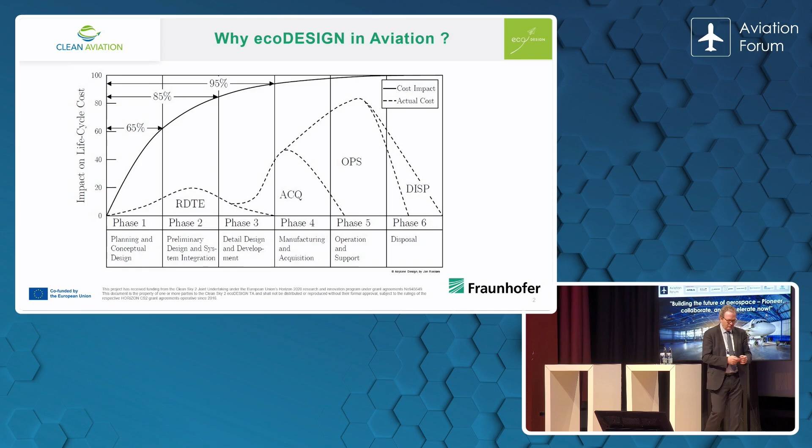That's what matters and distinguishes ecoDESIGN technologically. There are a lot of very simple principles in the ecoDESIGN phase for an engineer. For example, the aviation industry takes a clear vision toward modernization-oriented and repair-friendly product design, as well as substitution of hazardous chemicals regarding REACH compliance.

And of course, standardization of components, a suitable design for sorting and testing, as well as wear steering on selected parts where corrosion or other issues could take place.

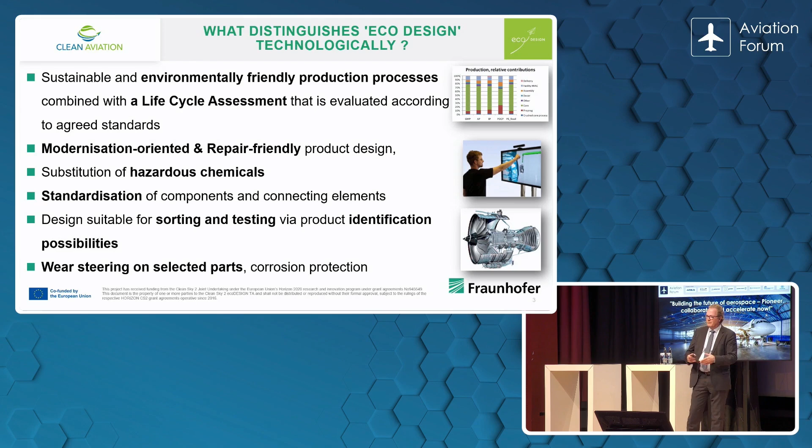But one of the most important tools for the final improvement and proof of sustainability is the life cycle assessment method. It's not rocket science, it's just a tool already developed, and you can easily compare results from different technologies in relation to their final impact on the environment.

Sustainable aviation is not only reduced to carbon dioxide emissions, NOx, or noise emissions - no, it's really more than that. It also means taking responsibility for hazardous materials as well as socioeconomic aspects - what will the working place of the future factory look like?

That is already combined in the so-called life cycle analysis, combined with the design for environment, called the 2020 plus guideline. And I will show you some principles.

I'm sorry for the bad quality, but if you're talking about life cycle assessment, that means you have to collect a lot of detailed data on the certain processes, starting from the raw material, producing all these metals, polymers, and chemicals for production, as well as during the production phase process in the factory.

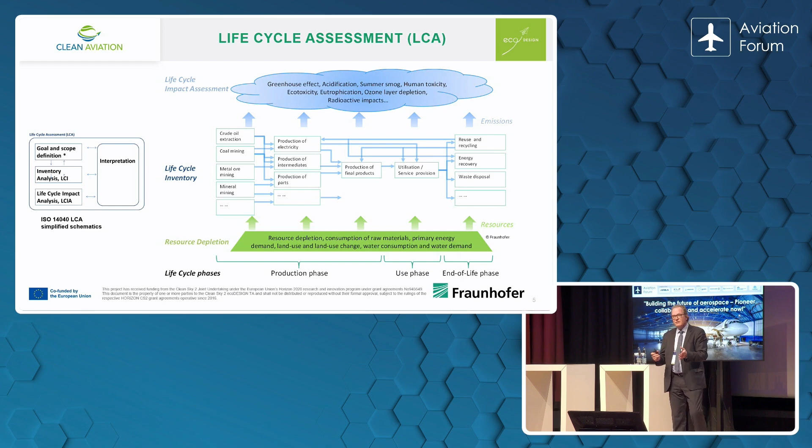And you also have to take care, after lifetime, about recyclability of these materials. That is of course a real challenge, because in some cases the targets are counter-current - you would like to have a really stable material during its lifetime, but you also want recyclability at the end. That is really a challenge for future material developments.

Just have a look, for example, at the actual status in the so-called Clean Sky joint undertaking, the biggest European activity with all the aviation producers in Europe.

At the moment we have around 200 technology pathways already in our database, with around 550 processes. And it's not just collecting data - there's a lot of algorithms behind it to reduce and compare these different processes, always reduced to 1 kilogram of product or 1 square meter of a product.

That means you see here one example - it's really a comprehensive study and also laboratory work, talking with the engineer to get the full status.

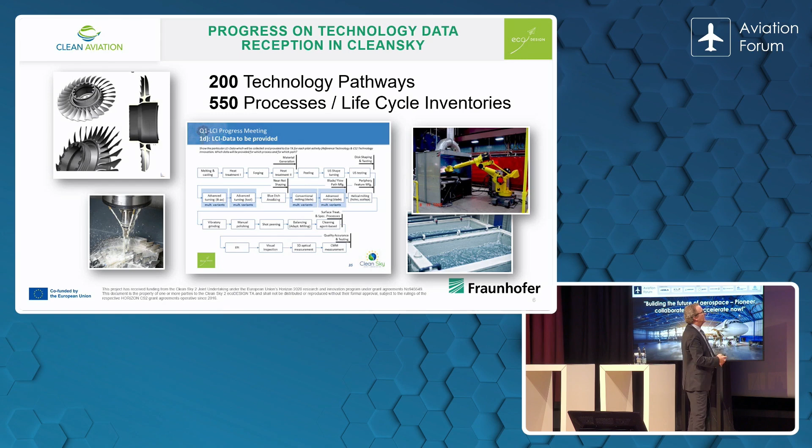Here you see what efforts are made in the running Clean Sky activities, where all 6 platforms - these typical modules of an airplane - have realized their certain flagship demonstrator as a representative of the most sustainable technology at the moment and for the future airplane. For example, large passenger aircraft with a multifunctional fuselage and advanced rear ends.

All these components were collected, the data, then recalculated to bring it on the same comparability. Then you come to a life cycle inventory where all the data are comparable. And then you will come finally, of course, to the eco statement.

And meanwhile, at the moment, we have more than 30 indicators which were calculated automatically if all the data are inside.

And then it's not the duty of Fraunhofer to decide, okay, you have a part where wonderful small energy consumption has a problem probably with more cancerogenity of this part. No, we just calculate all this data and give them to the data owner of these flagship demonstrators.

And that is, of course, then the turn back to discussions with the companies to say, okay, these data we have to discuss about. What are the main advantages and main disadvantages?

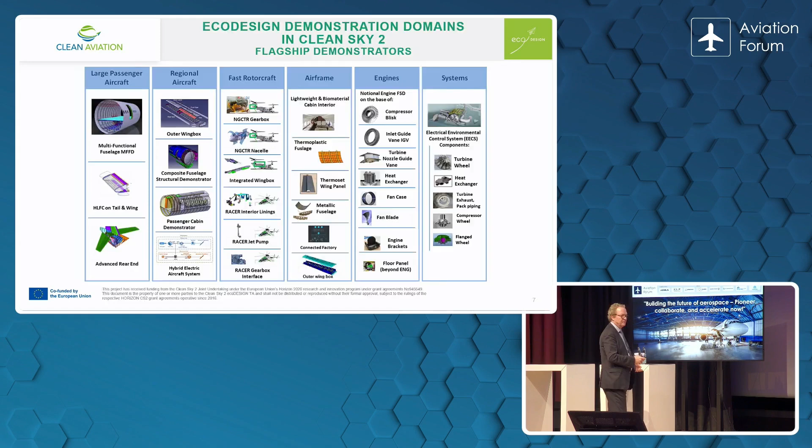And you see here, the life cycle assessment is not only about the machining, it's also about additive manufacturing. A lot of technologies are meanwhile realized by additive manufacturing, which is wonderful because you can realize it with less material, buy-to-fly ratio, and so on.

But we are also talking about composite manufacturing, recycling management, and of course socioeconomics. What is a workplace in future? What is a business model behind it if we are talking about recycling and so on?

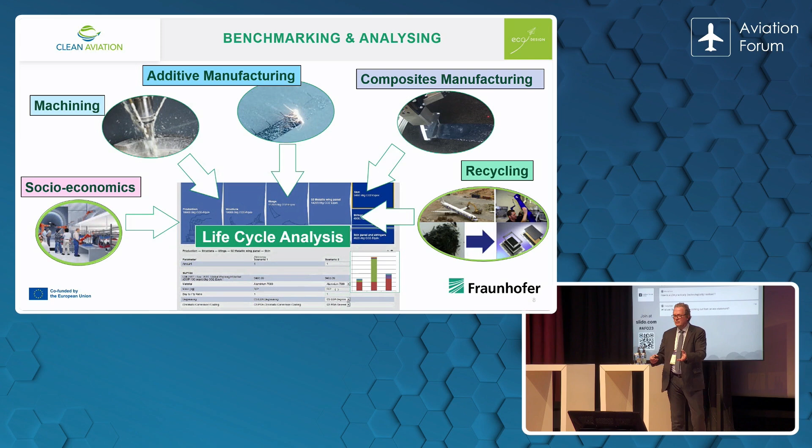And finally we come to that analysis, and here I will give you one example of a Fraunhofer development together with industry. It was a strong target to realize a seating structure made out of a monomaterial, which is then, after lifetime, more easy to recycle by a certain polyurethane system, which is recyclable.

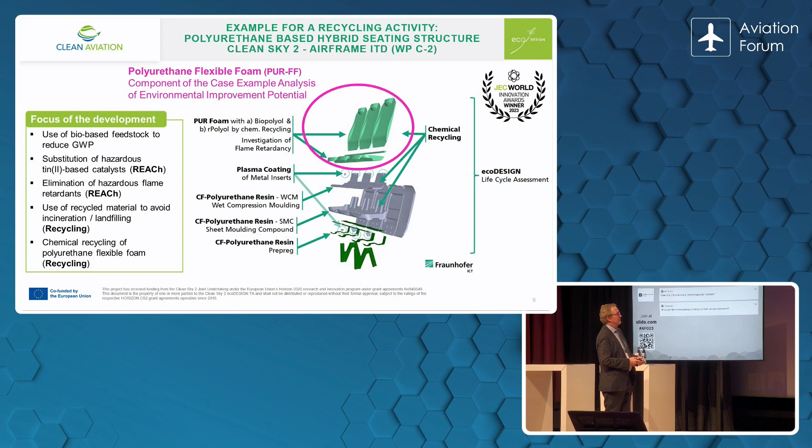And we also were able to get rid of the flame retardants inside, because that polymer already has intrinsic flame retardancy. And we got this year in Paris the JEC award for that.

Yes, and coming to my conclusion, it means finally, yes, there are existing tools for final assessment of sustainability. They exist, they just have to be used.

And yes, ecoDESIGN combined also with innovative engineering within the product planning phase helps avoid companies having higher costs at the end, in the end of life.

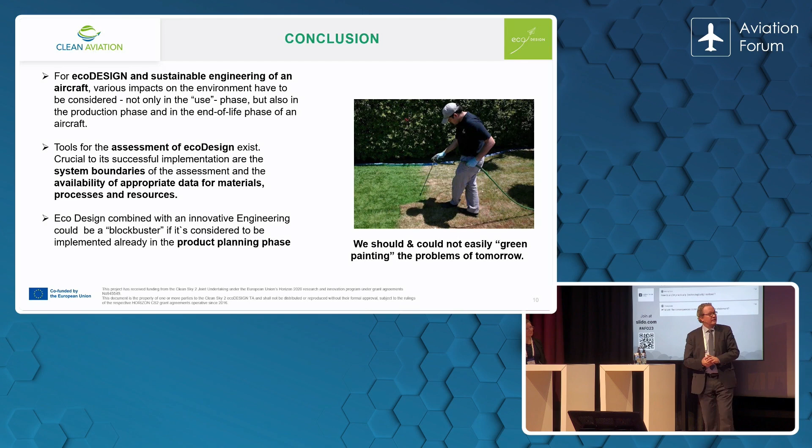And yes, you see here on the right, we do not have to paint environment green because aviation industry is really well developed. And that is just a challenge to use all these available tools for calculating the final sustainability. And I would say thank you very much for your attention.

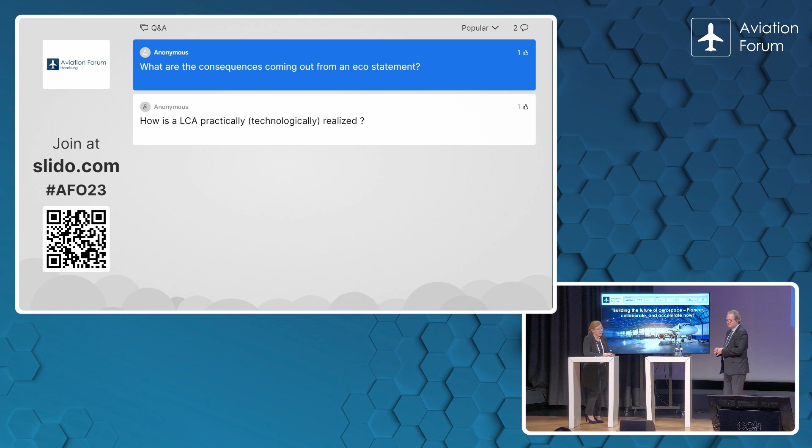Okay, and how is an LCA practically, that means technologically, realized? Well, it starts with a discussion with a responsible engineer at that point of the technical process, collecting data. Then the data are recalculated.

And meanwhile, we have also realized in Clean Sky, how can we share data probably in the future? Because I have to say, these data are highly confidential. So they represent the know-how of a company.

But in Clean Sky, now in Clean Aviation, we try to realize it in an aggregated way, so that the data are comparable, coming from a polymer process or metallic process, and can be compared in a way that other companies can use too. But it is, to be honest, it took Fraunhofer the last 3 years to accompany all these flagship demonstrators in calculation. And the final results will come next year.